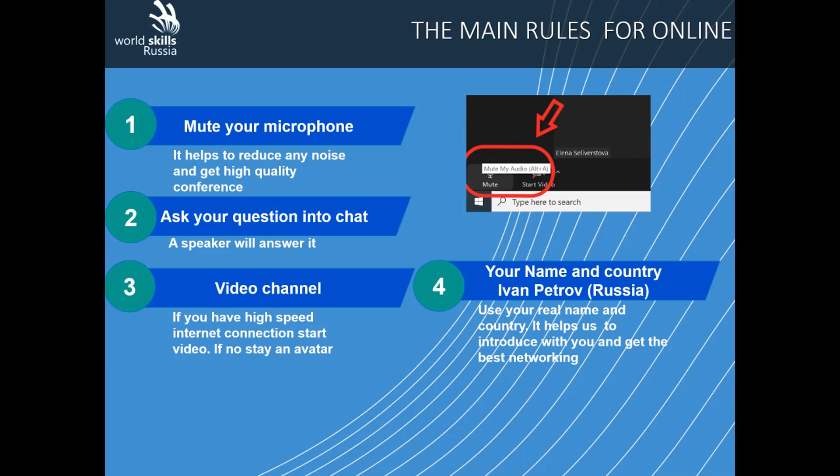I just saw a question in our chat concerning today's meeting, so I'm answering: yes, we will have a meeting today, so we will really need maybe some more additional meeting minutes to let everyone join.

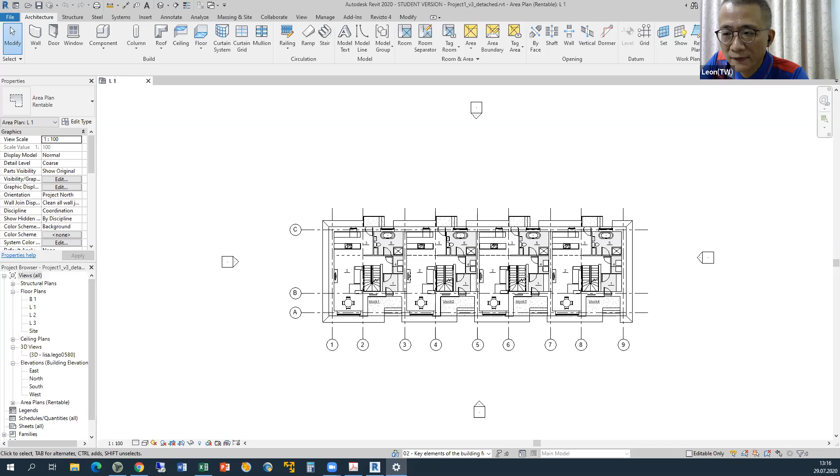Well, it started to cooperate with me. Let me see, I can do it. Or if you don't mind, Jacek, I can do it first. Okay, so perhaps Leon, try to start the thing. I'm sorry everybody, it's sometimes as usual, it happens at the worst moment that your computer hangs. But Leon, take part, and I'll try to do my stuff.

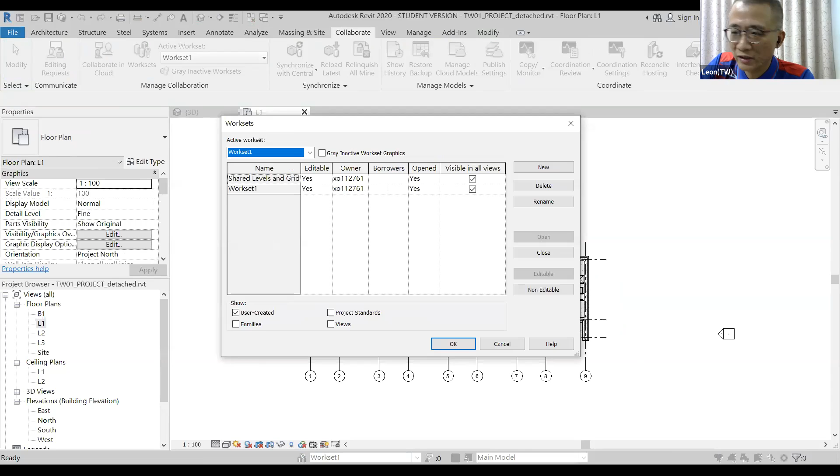Okay, in here, you go to collaborate, then worksets. In worksets, it just has workset 1. So in here, I think this one should not be yes, right? This should be no, right?

Yeah, and as well as the elements are not structured by worksets. So here is none, right? Yeah, because there is.

Leon, maybe you could also open this mark scheme, what everybody knows, what you're assessing. It will be more visible. Because guys didn't see the workset, no, the table? No, we see right now only a Revit screen. Oh, really? Let me see how.

Share a screen, not a program, because when you started to share, you choose, and you should really choose, for example, to share a screen. In that case, you will see everything what you have on your screen. Okay, let me try again.

Can you right now see? We see right now the Excel table, yes, and the Revit, yeah, it works.

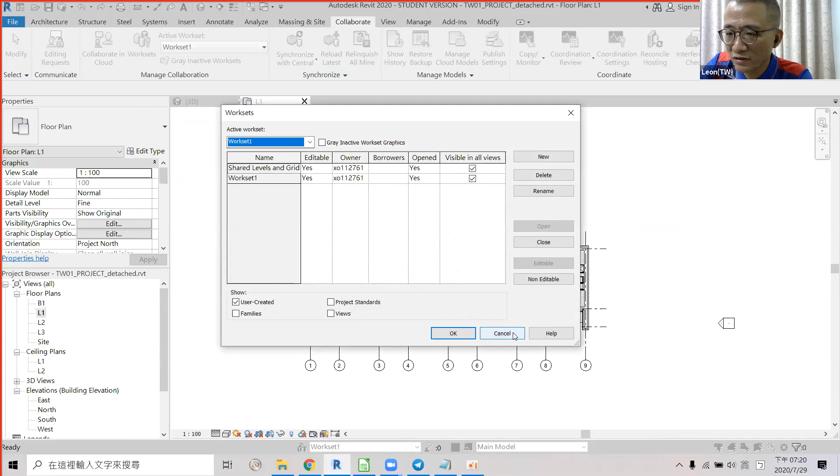Okay, thank you, cool. And right now I'm checking the elements. The second one, elements are structured by the workset. But in here, my student didn't do the workset. So in here, he didn't get the point, right?

So the third one, material are assigned to the object of doors used. So let me try to see.

His door. So, sorry. Okay, and I am checking the material. So he has two materials on the door. This one, check.

And so in here, I have questions about the material because my students use the Revit in English version. I mean, they use English and Chinese version at the same time. Then some of his project has this kind of like Chinese letters.

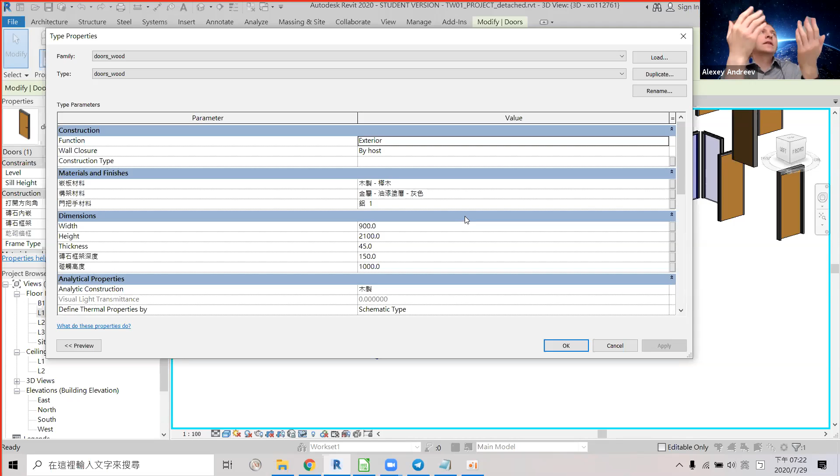So I mean, in the competition place, we will have the computers which will be 100% according to our rules. But right now it could happen, and we saw yesterday, I guess, when we assessed some Russian students. So I mean, if it's okay, we should really train.

Okay, cool. So in this part, also this door, it has material, 3 of them. So in here, material are assigned to door. Is yes.

Then about the window, let me see the window. In here, the type. There is no material on it. But when I try to double click to this family, try to see on here.

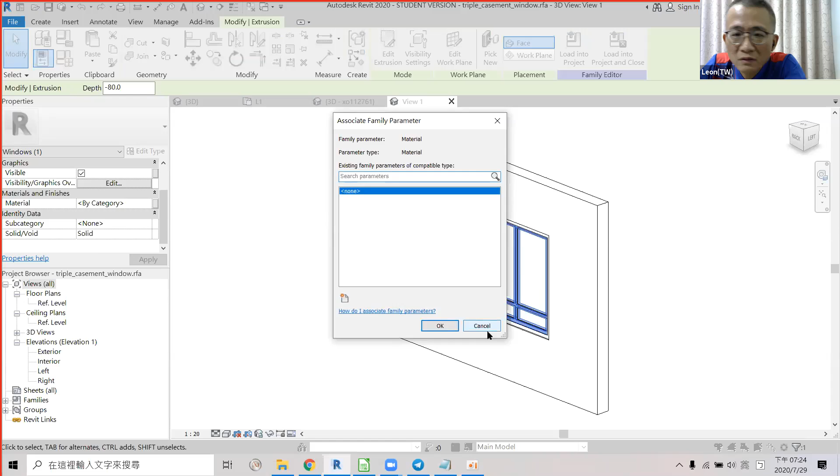And here, material assigned by category. So in this part, I think he gets the score.

What do you think? If I'm right, yesterday if it was not explicitly assigned, we signed as a no. Correct me, Anna? Yes, it's right. Yesterday we put no in this case.

So if they show in here by category, he didn't get the score, right? So it was yesterday, for example, when the students did not explicitly assign the materials, we scored as no. Okay, thank you.

So number 5, material are assigned to the layers of the wall type used. So here the wall type.

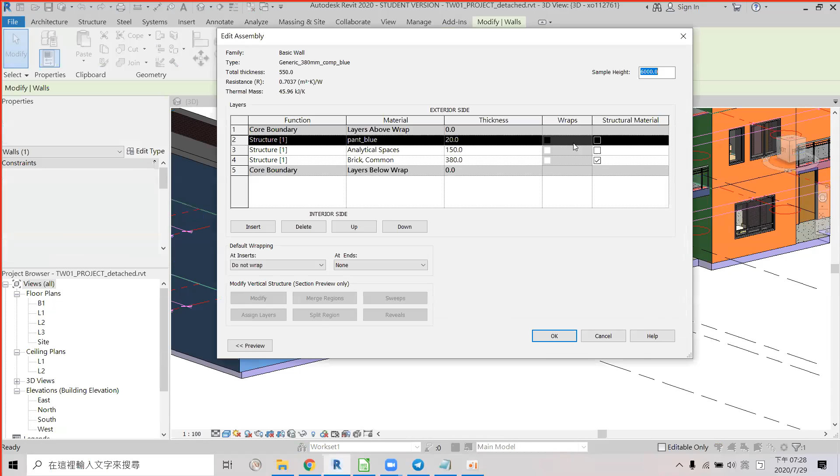Okay, so in this case, thank you, Anna. So in here, he has 3 different types. So

In here, I think the wall types should have like 3 points, right? Not in this way. 5 types for all projects, at least 5 types, not for one wall. Okay, for all models. We can have one type, one material in one type, or 3 materials in one type, but for all the projects we should have at least 5.

Okay. So let me see if there are any more types. There is one more. So total points in here should be 5 points, right? Right. Okay.

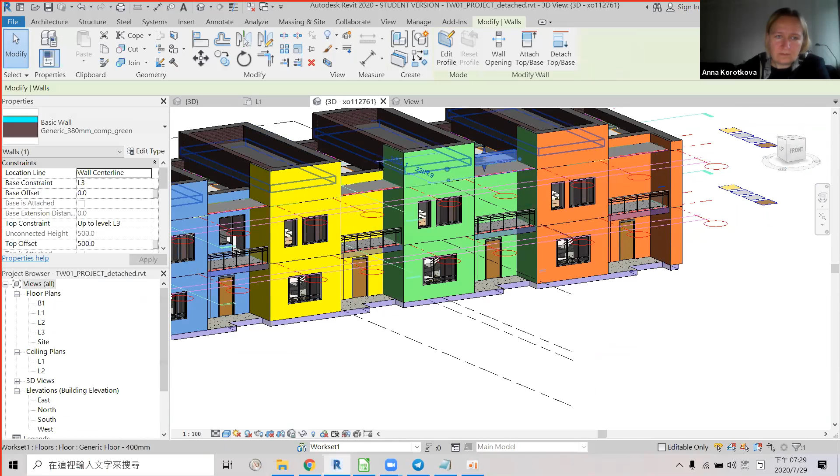So in his case, I think he has only 2 types of walls. Let me check again. Sorry, Anna, you can speak. I think that we have another type in interior walls.

They should have material, and in our project totally now we can see 5 materials. If I correctly understood, Anna, she also mentioned about internal walls, which we should also count. Correctly, Anna? Yes, correctly. So where can I check the total numbers over here?

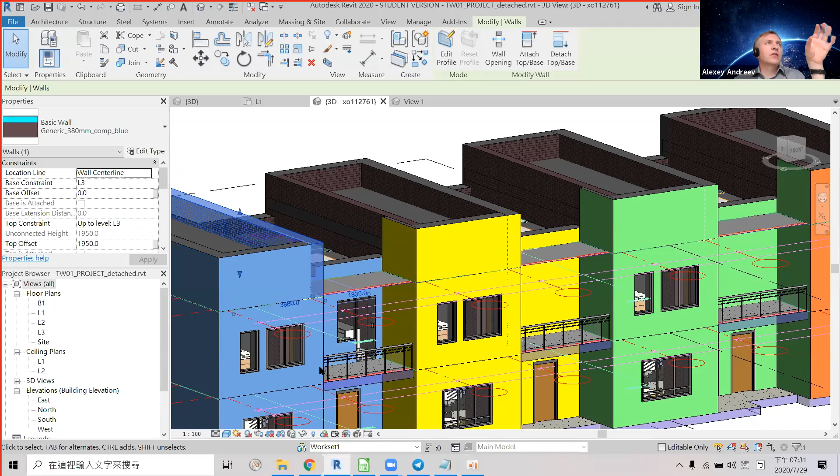Anna, did you yesterday check on the floor plan? Yes, this type of walls, on the floor plan. Leon, can you really check the floor plans? Floor plan? But let me see.

In here, we are checking the wall types, right? And Anna is saying about this, right? No? We are talking about the floor types, right? Checking from here. Not about floor types, but about walls which are not exterior walls, not outer walls, but which we have between rooms inside the house.

I don't really understand what you mean, sorry. Leon, I think that you should go to the first floor plan, for instance, find an internal wall. You see somewhere it's close to the staircase, whatever. You have some walls here. Oh, you mean this one? Oh, this is okay, a partition wall, probably, but also should have assigned materials, as I understand.

So check the edit type of this basic wall. Oh, okay. So it doesn't matter how many layers they have. The only thing we have to check is the material on it, right? Also here. Here. So it has the materials on it.

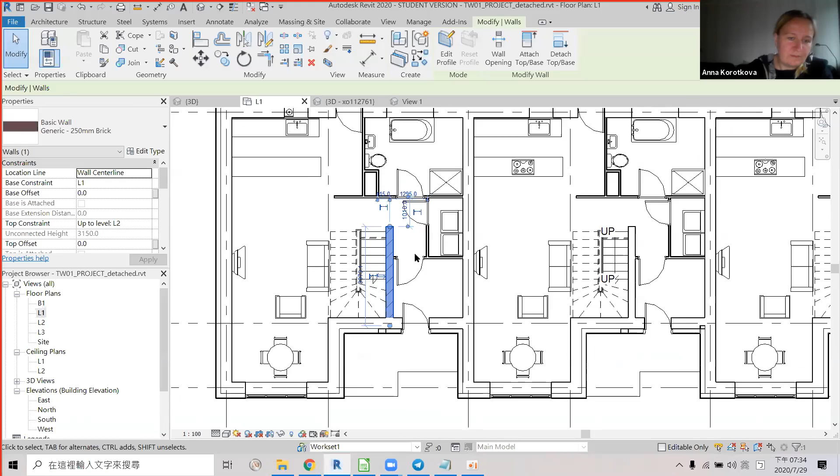Okay, but you also can check the wall which is on the grid inside the house. Which one, please? And you are muted. The wall, load bearing wall, which is situated on a grid, on axis. Which one?

Leon, I guess it's not only internal wall you should count, but also external wall, right? Yeah, I'm talking about internal wall. The external walls, there is only the thickest internal wall. You mean which one? I think the internal wall separation between the house and the other house, the center one. Yes, that one, I think. This one? Okay.

Yeah, it has material on it. Okay. So 1, 2, 3, and 4. And what else am I missing?

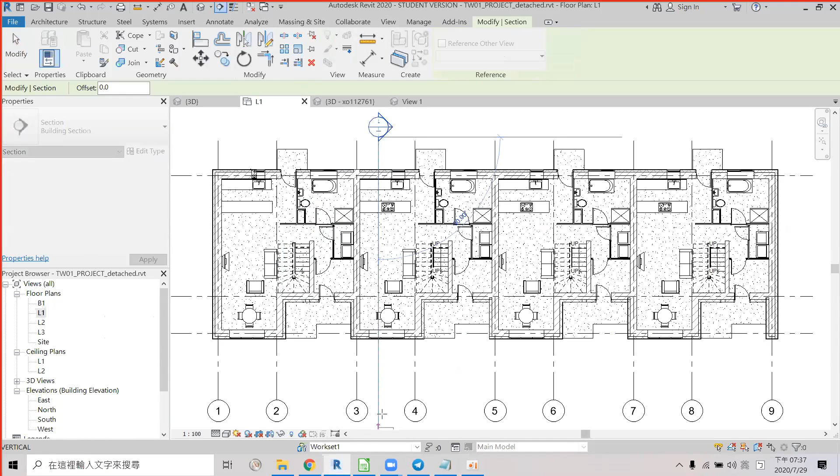Oh, how unfortunate. Is that... No, thank you, it's okay.

Material are assigned to the structural floor types used. In here, the students only use one floor. Let me see. In here, floors. Yeah, it has materials. And in here...

Yes. And this one. Actually, this one should be roof, but the student did it wrong. It used the floor. So in here...

So in this situation, should this roof count in the point if he did it in the right way? I mean, if the roof has material on it, should it count the point? For my point, it's not. So in here, the structure type of material used in here should get only 1, right? Because in here, the students used the same one for in here and here, right?

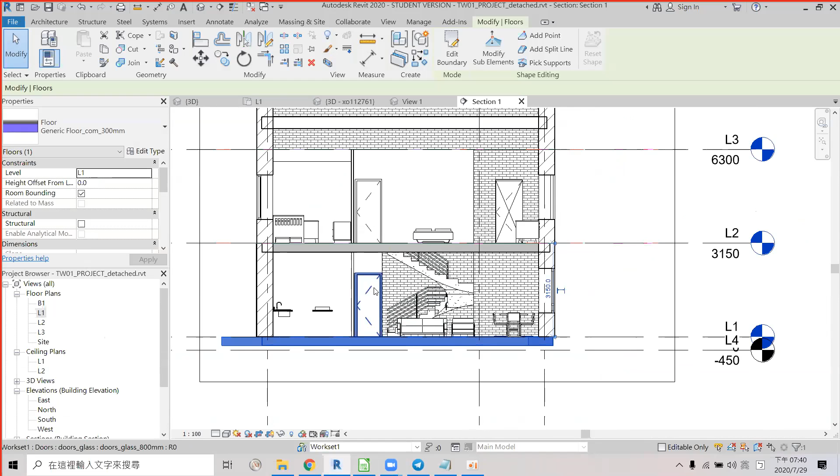Okay. Yes, that's right. So in here about the roof material, the student didn't use any roof on here. It's not roof. So in here, he should get none.

Okay. And material are assigned on object. Let me see the stairs. Stair. Isolate. Sorry. Edit type. Now in here, I didn't see the material, and also let me try it in here.

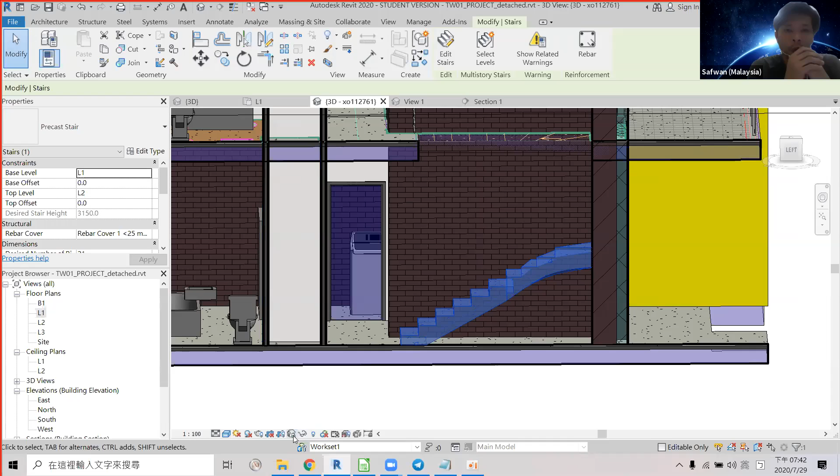Sorry, I have a question regarding the material assigned to the stair. Basically, there's no default parameter that indicates the type of material of the stair. So should the student customize a new parameter so they can assign it, or just rename it as maybe some precast stair, or cast-in-situ stair? How do you think about this issue? Because there's no default parameter assigned to indicate the material used in the stair. Maybe others could help me with this issue.

For my thinking, I will give him the point for this option. How about you, Anna?

Yeah, because when I try to check his material on the edit type, I didn't see that option here, but in this way, I see there is a material on it. So I think here, his material is already assigned. I think the material is assigned, but I don't know exactly how it was done.

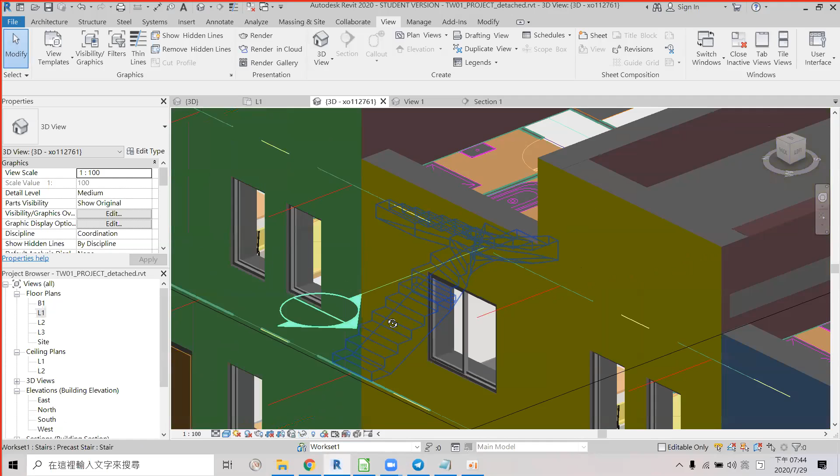So here is a similar situation as we discussed. So the student here, he shouldn't get the points from here, right? If he just assigned by category.

Student should assign the material here. Yeah, so in this situation, he didn't get the point here, right? Yes, this is what Anna says, Leon. Okay, so 'just by category' means he or she didn't do anything about this material assignment.

Okay, let's assume another situation, because my student didn't do the railing on his stairs. So I'm thinking, if he did a railing here with the material, should he get the points here? Because here he didn't use the material, but here he used the material. Should he get the points from here? It's like half and half, right?

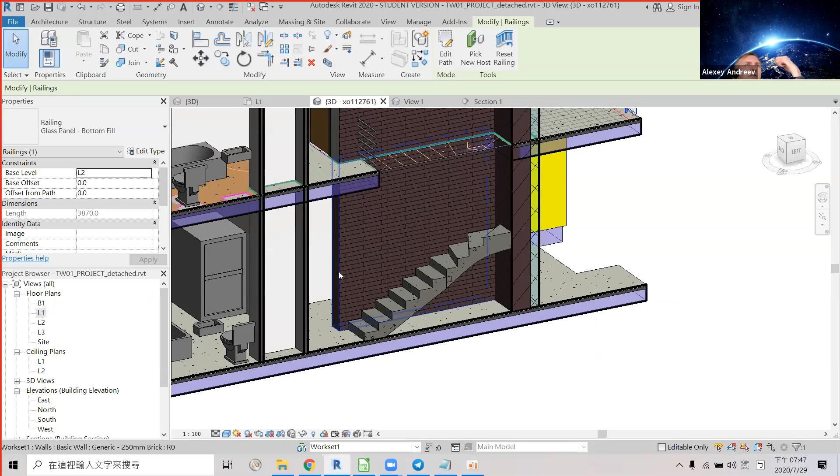But Leon, did the students do railing? I mean, on the stairs, because right now we saw the material on the stairs itself, not on the railing. That's why I'm asking. I mean, if the situation is the student did the railing here and also here, only did it here but not here.

So should he get the points here? But so far we saw what students did was assign materials for stairs, not for railing on the stairs. So it should really be different. Oh, okay, yeah, okay, I get it. So here it's no.

Okay, let's move on. Is the load-bearing part of the outer walls modeled separately?

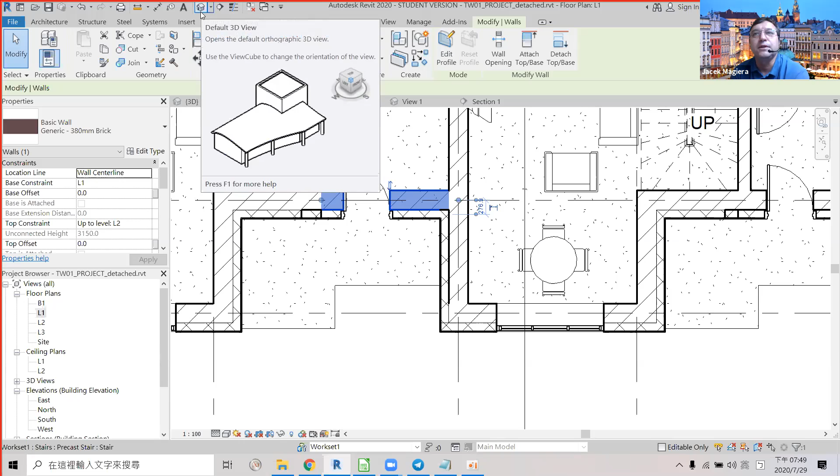Yeah, this one was different from the exterior decorative wall, but the other way, in the upper part of the floor view, you really have a compound wall with the load-bearing part as part of the whole wall. So it's partly okay, partly not. So in total, it's not. Yeah, looks like it.

Okay, do you agree, guys? Looks like we should punish them if the scoring rule is 'walls,' meaning all walls. As Alexey always says, we should really punish our students and work towards WorldSkills, so they're aware of these catches.

And you see, Jacek, to me it's always painful when I have to punish students. Well, yes, it's not a comfortable thing to do, especially when they think they did what they were supposed to do, because it's a building, it has walls, and so on.

Yeah, so for my thinking, in this part we have the score as a measurement, so it's a yes or no question. So if someone did part of it, he shouldn't get the score. That's my point, what about you guys? For example, if we set up rules yesterday, we should follow them for all students with a similar procedure. So in that case, I refer to Anna - what's really the restriction, the assessment method, the criteria used yesterday? What do you think?

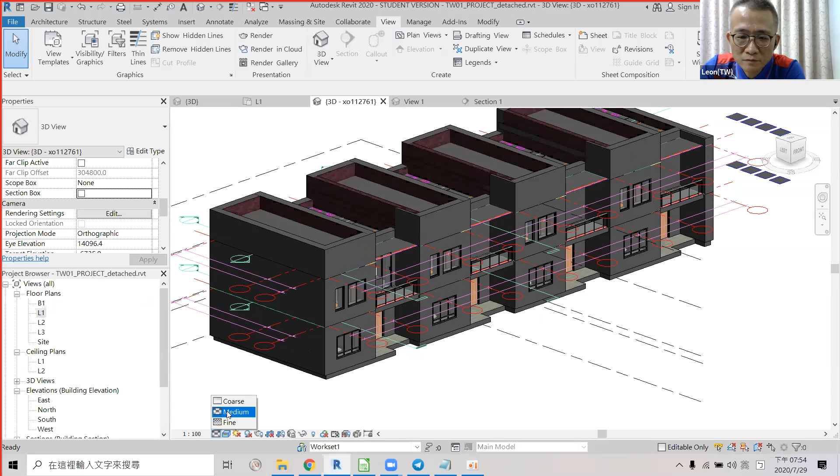So, okay. All walls are classified according to the building floors. Here, level 3. Here, level 2. Here, level 1. Level 3. Level 1. Level 2. 3. 2. 1. Okay, so in this part, you get the score.

And here, insulated layers protect the load-bearing parts from all sides. In here, he is trying to do this. Same here, but here he has something wrong. So in this situation, I believe here is not right. That's right, yeah.

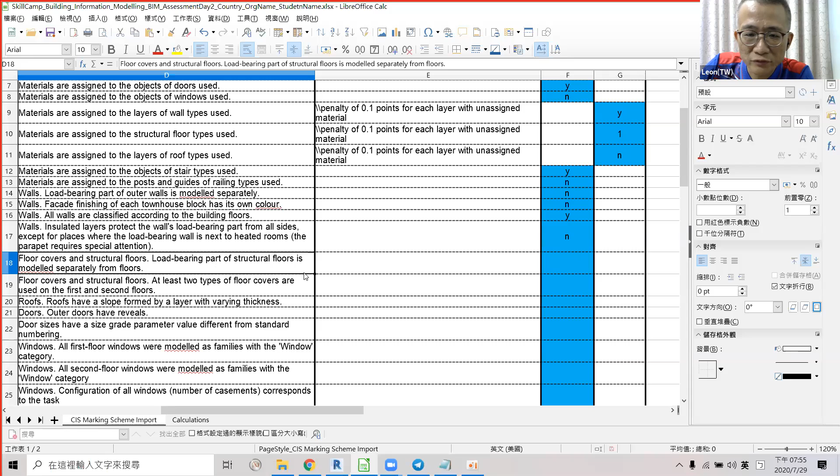So 18, floor covers and structural floors, load-bearing part of structural floors, is modelled separately from floors. Get him the point. And roof, there is no roof. And door, outer doors have reveals. In my case, they didn't do it. So reveal, no. Door size has the size grade parameter value different from the standard number.

Door. Okay, let me check the door. So in here, we should have type in here, should be like this, right? So in this part, no.

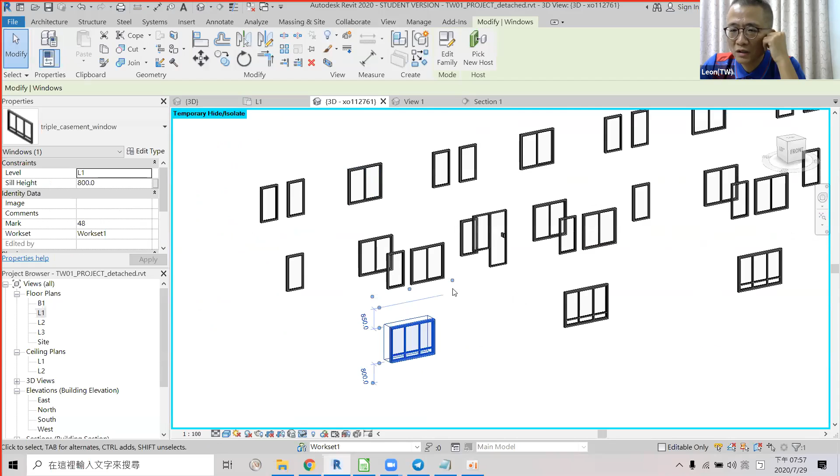Balcony doors, we should check only the categories of first floor. First floor, as a category, it's Windows. All the time you've got the Windows category just next to edit type. So it's perfect to me. Oh yeah, you mean it says Windows here? Yeah, everything is a type, a category as Windows. So it's perfect, should be yes.

As I don't know, Anna? Mm-hmm. Alexey, what do you think? That's okay, it's correct. Yeah, it's correct. Oh, yes, really?

Okay, the trick was with the balcony door, it should be category. Yesterday, somebody put it not into the categories as a window, but probably as a door. But today we see the balcony door, it's one instance of the family, but still it's a window type. So it's a category, proper category for this. It was the requirement. So it's perfect, yes.

So in here, we should put yes. So second floor is the same. Let me see. Second floor. Yeah. Okay. So in here, 25, Windows configuration of all Windows, numbers of casements correspond to the task.

I think it's yes. And Windows have no reveals. And 27, along the perimeter of the building above the window are cast in place reinforcing belt. Reinforcing belt.

No. And also it has no lintel above door opening. Let me see. Yeah, there's no lintel. So it's not.

And here, this one, I'm not pretty sure. Let me see my students. There's no beams. And also in here, there is also no beams.

But I'm not sure what kind of situation here should be correct, because I try to see the drawing. Where are the beams? Does someone know about this? Anna? I can show my desktop and show it in my drawing. Okay, okay.

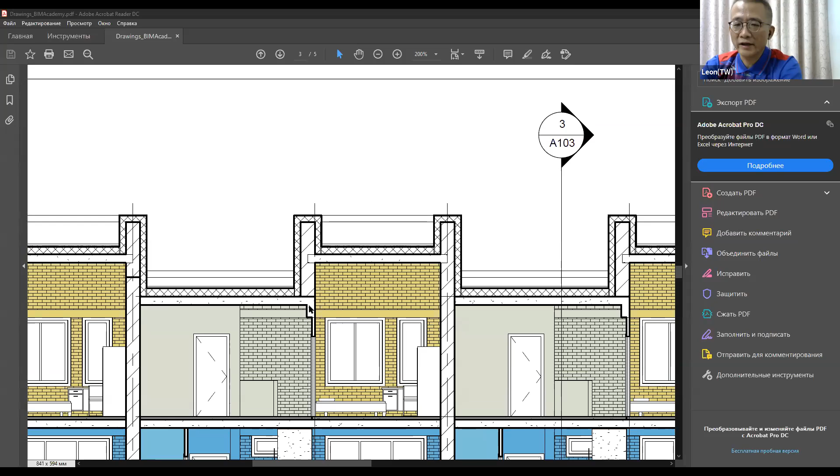This one, can you see it? Yeah, it's about this. Okay. Now I get it. Thank you.

Okay, you mean here and here, right? Cool. So in here there is no cameras.

No topography, terrain. And we see, no, there is no terrain. And furniture. In here, my question is,

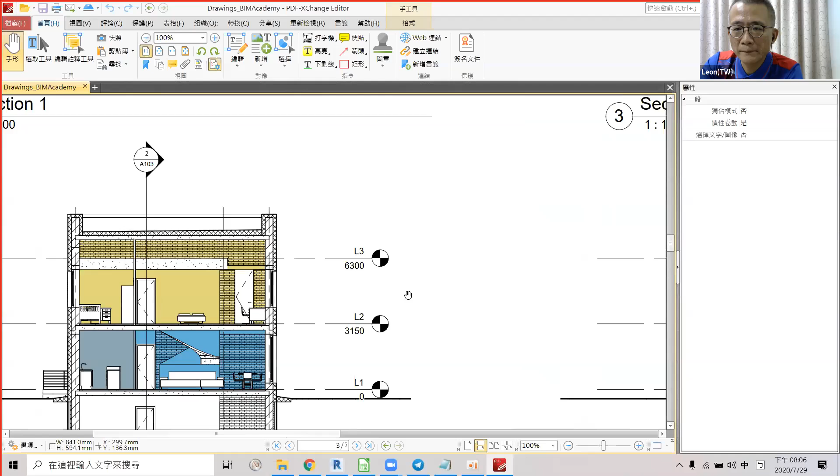should all students have all the same furniture as we show here? For example, the sofa here is different, but he has everything on his floor plan. So should he get the score? My point is he will get it. What about you guys?

Here and here. And also the television is different.

I think, Leon, that yesterday's task was something about a 200 millimeter allowable difference between the furniture and all this stuff that they were supposed to borrow from the sample RAC sample file. And there was something that measured this performance, assuming this time we are not bound by this demand of 200, at maximum 200 millimeters of difference.

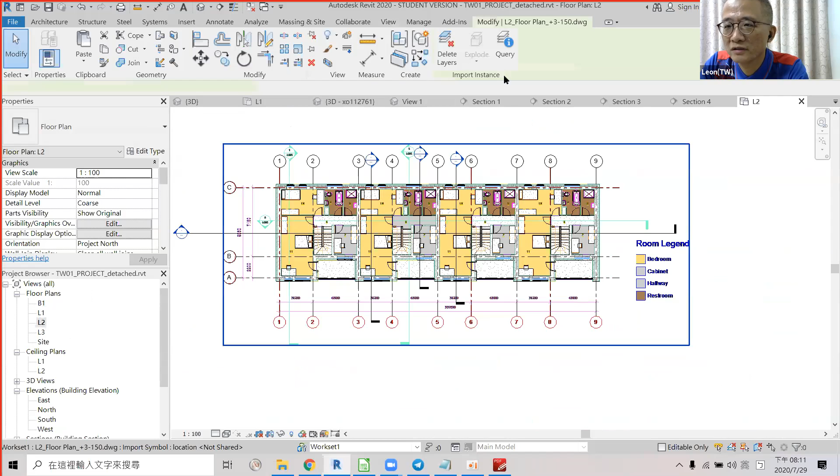And second floor. Yeah, in this case, it's best, it's wrong.

And the toilet is different, so he shouldn't get the score from here. Right? Okay.

So stairs are modeled. The beginning and end correspond to the level.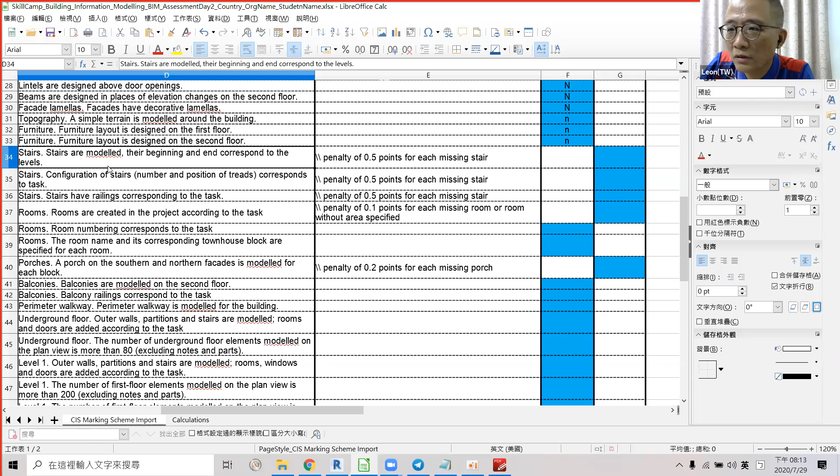So its number should be 21, and correspond to the 4. Correspond, so it's yes, right?

And also configuration of stair numbers, position and treads correspond to task. Yes.

So the rating is different, because in here the rating should look like here. Yeah, so it's wrong. So here, no.

But in here, I'm not sure if I understand. Does penalty mean in total we have to have four stairs, right? 1, 2, 3, 4. So if we lack one, it gets a penalty of 0.5.

Totally, we should have 4, and if you have only one correct type, you can put the number of it here, and then about points, we'll check it ourselves. Okay, okay.

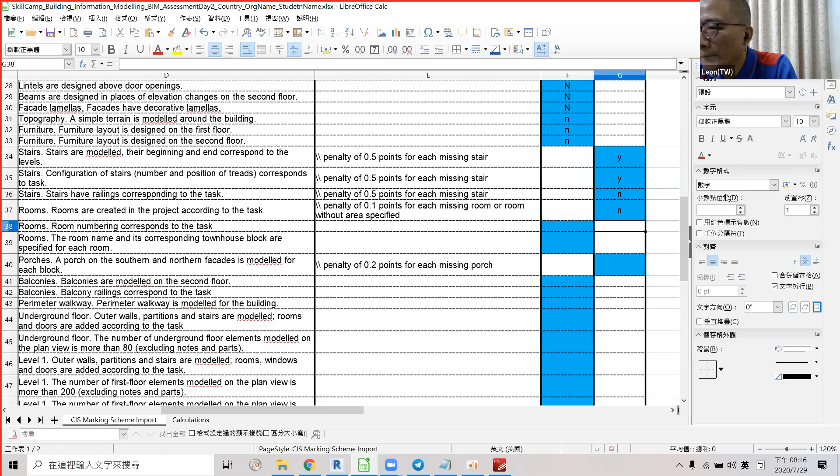Totally, we should have 11. 11? 11. Okay. Per segment or?

Per section, yeah. Okay, cool. So in here, room number, no. Room name correspond, no.

Porches. In here, I think my student... here, and here, but it's not correct. The issue has the rating in here, but he didn't do it. But I think he still can get the points in here, right? What do you think, you guys?

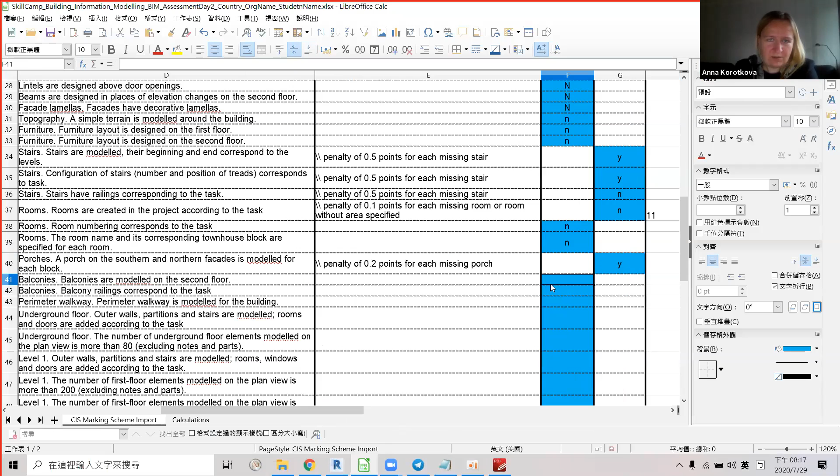Cautious? Agree with you. I think it's no, because the configuration of the porch is different. Okay, thank you.

So, balcony is modeled on second floor. Here. So it should be yes. And rating here. This one, let me see. Here, yeah, it's the same one. So in here you should get this.

So perimeter walkway? No, there's no walkway. Underground floor? Unfortunately, no, it's empty. So, no. Underground floor? No.

So level 1 outer wall partitions and stairs are modeled. Rooms, windows, and doors are according to the task. Because in level 1, my student didn't do the rooms, so I think in here he shouldn't get this score.

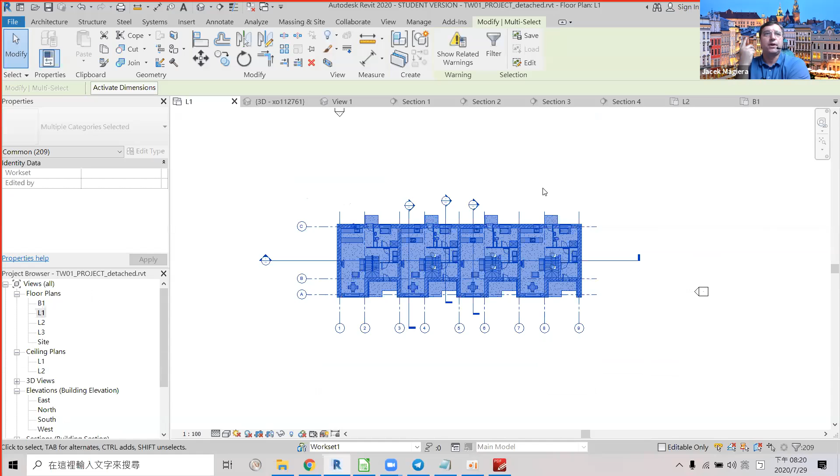Because you selected everything. You just could go to the visibility graphics setup, as yesterday Anna did, and then filter out all these annotation categories. You go to annotation categories, the second tab, in the upper part, a little bit higher. Yes, it's lower. Sorry, you mean this one? Just one line above, annotation categories.

It's a tab. You see the tab? Oh yeah, switch it off. Click it, and switch it off. Show annotation, it's a check mark just in the line below. No, to the up this one? And to the left. Yeah, here, just switch it off, and it won't be shown and it won't be selected.

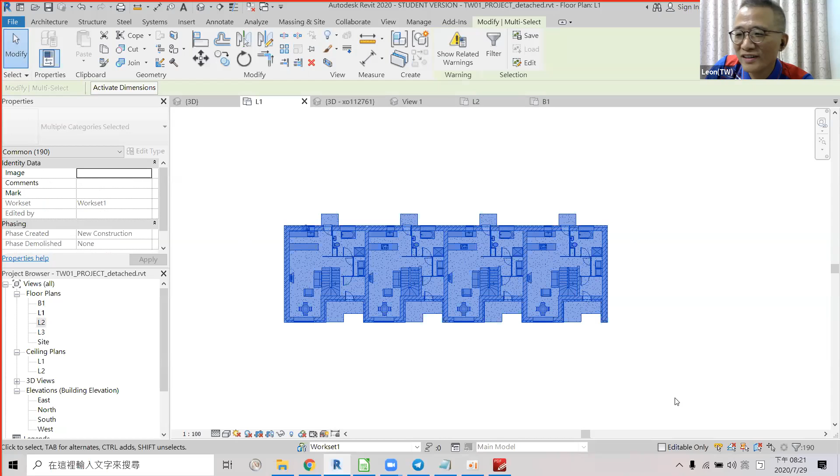Okay, do the crossing window selection. Okay, so right now here, yes, it's only 190. So no, no, no, no, no. So should be in the second floor. Didn't pass.

No, now you're still on level 1. You didn't switch the view. It was not bold type. Click twice. Yes. 190. So it's still here. And the rooms are also not present, so it's no.

No way, they will be upset. Today when I was doing this, I was thinking about how long did every expert take to do this. For me, I have two students to assess, and I spent a whole day doing this.

Okay, so we will have one for about 4 hours. What about you guys? So, Anna, how much time did you spend assessing your student for yesterday's task?

You are mute. Half an hour per student, for one student. Okay, Jacek, how much did it take for you? It was much more because I have to check everything, the number of walls, the number of different types. It's crazy because you have those numbers in your mind and we don't. So I just played the video from yesterday, tried to see what the discussion was about. Yeah, that's crazy. It was more than 2 hours to go through.

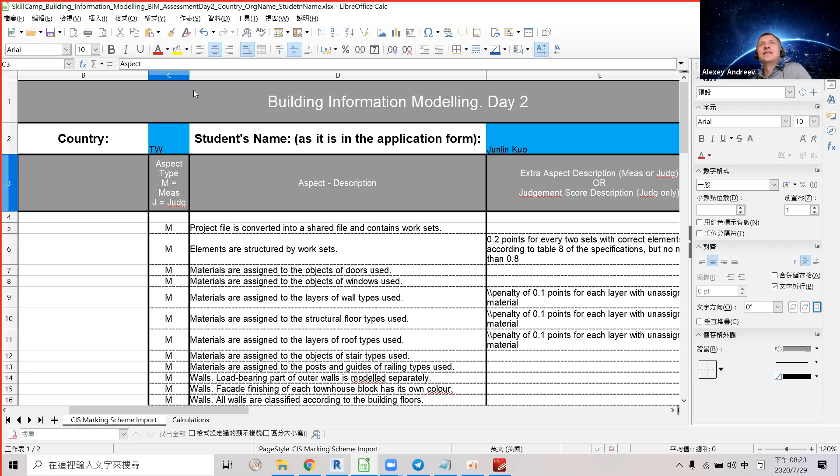Bruno, how about you from Brazil? Did you have a chance to assess? Yeah, not yet, I just assessed day one. My students haven't finished the model, we were working on it until 11 p.m. yesterday. Okay, no problem.

Someone from Malaysia, did you have a chance to assess the second module? How long did it take for you? Yes, it took me around plus minus 2 hours for each student.

Okay, so dear experts, we have a special reflection session planned for Friday. Honestly speaking, we're experimenting right now in Russia, and maybe we could show you soon — we're trying to do an automated assessment. So that's why, even right now, we try to have real measurable assessment aspects, so what we could convert into some scripts, into some automation procedure.

So that's the way we're thinking. That's why here we do not have any judgment scores. And you see, we also try — it's not perfect, as we all see right now — but that is the way we're trying to develop it.

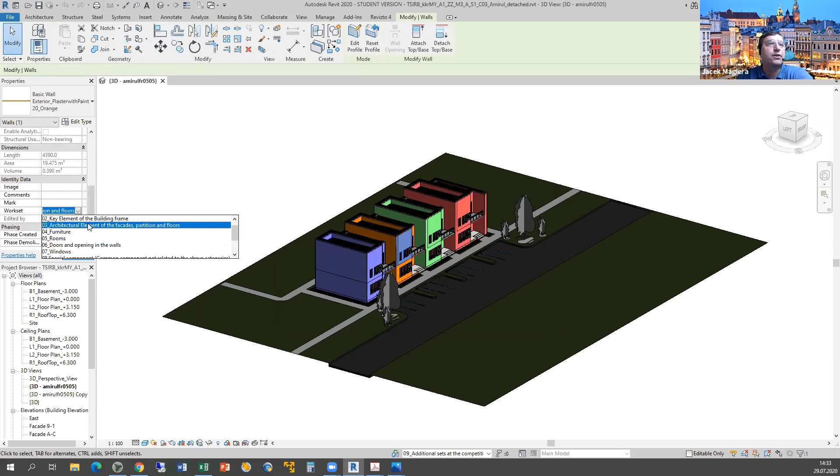So it's perfect. Perhaps some others - we're not able to check everything. It's a window and it's 07 windows. Oh let me see, it's furniture which should be on another workset, of course.

It could happen that some components are not on the proper worksets, and really, I don't know - there's a chance to go to collaborate and in the workset change the visibility. But perhaps there's no time to do it with every type of workset here.

Just we might try to okay this and see the furniture workset. So probably, well, the site element shouldn't be here, to be frank, and we see some trees.

But you checked also topography, so what was checked? Yeah, I'm sorry. So it looks - I didn't notice this, I'm sorry. Oh but yes, it looks topography. Yes, yeah, so right now it should, yes, and this is well what we see.

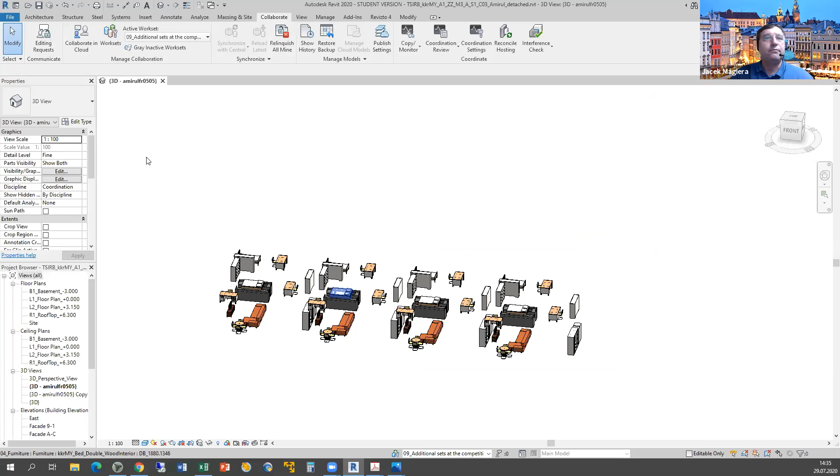Materials are assigned to objects of doors. Well, we then go to the worksets, switch the visibility of all the... is there anything else? No.

Okay so let me pick the first thing, I change to realistic. It's a loadable family, and right now we may check the materials.

Okay let us check another type of doors, and it's the same, so it's almost the same type of material. So for the purpose of this scoring, well, I think that it's yes.

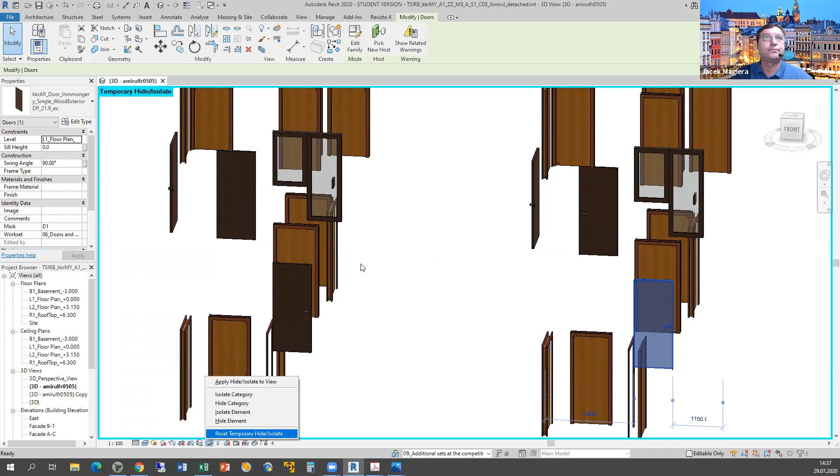The families they did by themselves from scratch, they didn't put the material category. My student also did this - they just forgot about this, as it seems, because there is no material category. So this element should go to the family editor.

We may check the parameters here, but there is nothing like this, so they should probably add some type of parameter like material here and so on. So because this type of window, I believe it's the problem that it was created from scratch, and this causes this lack.

So perhaps we should be more careful to prepare our students, you know. So anyway, do you agree that this is no?

Of course I checked one of the windows only, but they are the same style - I mean it's their own creation.

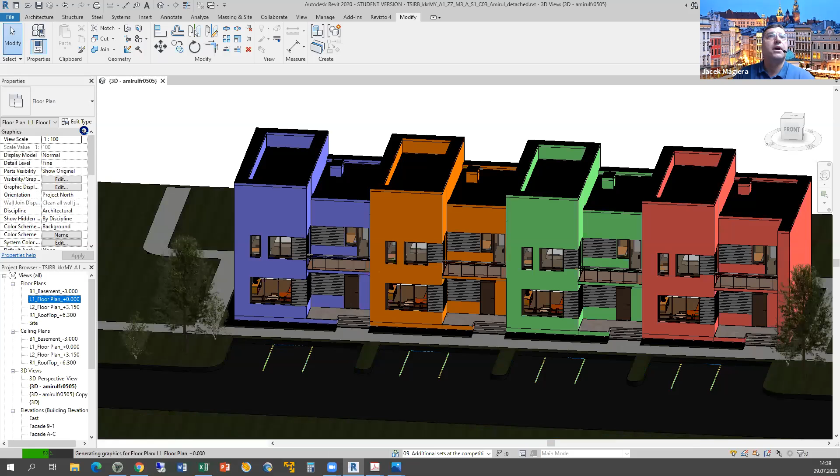Materials assigned to the layers of wall types used - so it's probably the easiest thing to do is to go to a floor plan view and perhaps not click on these things, but try to pick the walls they prepared.

And I don't see any particular wall that is a custom family, so there are standard families here. And walls, I'm sorry. So I really don't see...

I managed to switch off the properties, so it's basic brick, so it's probably a wall that was only modified by the competitor. And materials - brick common and structural materials - so it's correct here in that case. So it's the modified standard family as it looks to me.

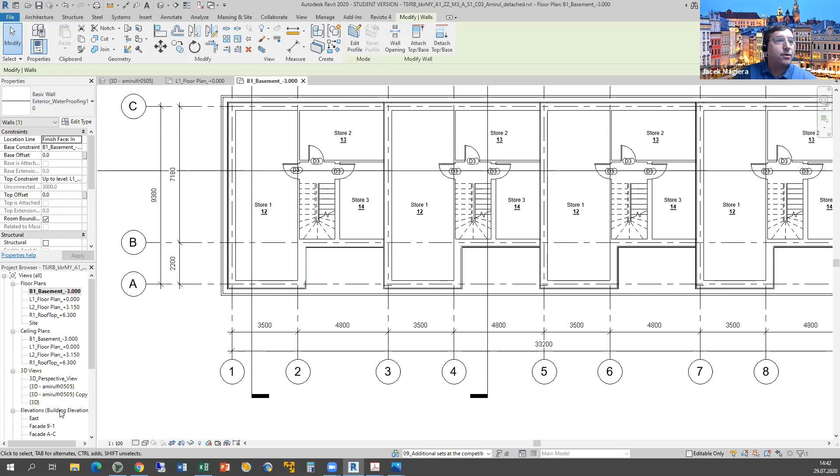So frankly, after checking this couple, I think it's yes here, which means that this at least 5 could be found. Structural floors. Do we have any cross sections here? There are some cross sections. Let's see a cross section.

So it's interior concrete 180, and the structure, it's concrete, looks nice. Nothing wrong with this. It's again the same.

It's basic roof, so it looks like this is another type of exterior concrete. Let us check this. Structure, and that's it.

So, by the way, were the thicknesses correct? Because I don't remember those numbers exactly, it was not explicitly put, so the student should measure them. But looks to me that 380 and 300 was okay. But Anna, could you please comment? I think you're right. I'm agree with you. Totally. Yeah, okay. So it's yes.

And materials to the layers of roof, we managed to touch the roof here, just in search of. So let us see this type and see the structure. So it's concrete. So formally the material is okay.

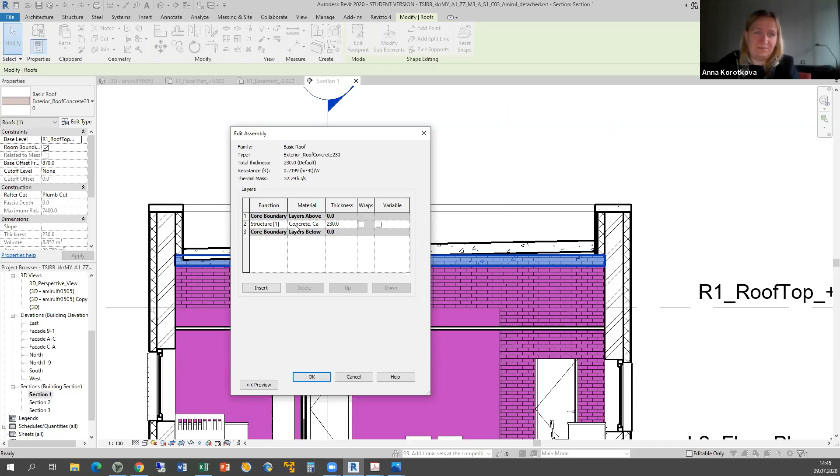So how do we assess this? Because it's not isolation, some sort of, and this variable thickness should be probably marked here as a property. So what's your opinion? I think they should put no, because this... yeah, it doesn't have layers. Well, formally it's one layer, and we will accept that this is a proper family.

Because there is another one here that is also a roof type, and this is, let us check this. Yes, this is another one, but there is no isolation, no. So the roof is somehow, you know, a twisted thing. So here we put no, as I believe.

Stairs. Do we see any stairs? Probably yes. Smooth structural monolithic concrete cast. So I think it's okay.

Another stairs, do we see any, perhaps on the 3D view, the external, or this is somehow... looks to me that, oh, it's not a run.

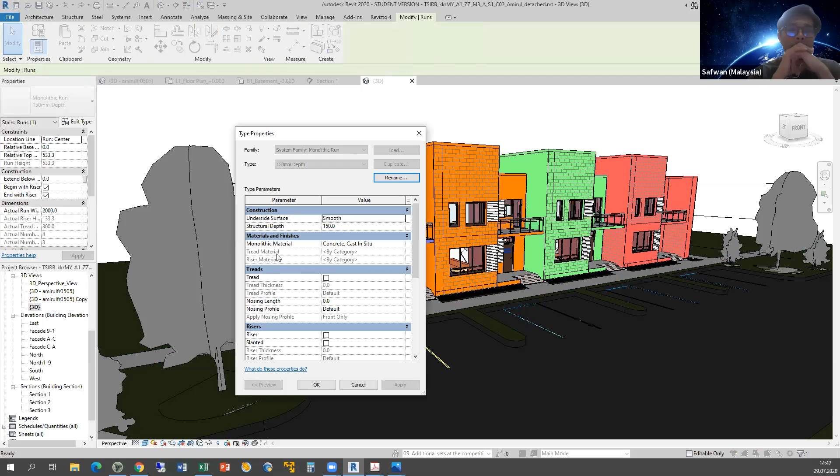Well, we don't have tread material, riser material. It's just a concrete cast in situ. So what do we do? Is it...

Well, if we agree that these stairs could be concrete, just simply concrete, no tiling, no wooden, whatever, so this is a material. I would accept this. I accept this. We can, yeah, do. There was nothing about any, you know, finish on this.

Sometimes in our country they have porches without finishes, only concrete. Yes, this is what I say. It happens very often that the outside stairs are simply a concrete thing without anything. Well, of course it depends. Frankly speaking, I'm not sure whether it looks like... it looks like some sort of different colors here, perhaps.

But well, it would depend whether we require this extra material because it's partly done. So yes or no. To me, it could be yes. Anna says yes. If anybody has any comments, please. Yes, yes, I agree. Yeah.

So it's modeled as a stringer gypsum wall board, so it's formally not railing. What do you think?

But I have a question. Do we have another way to do railing like this, not by using wall like in this project?

It's a good question. Perhaps we could think of modeling in place and look for a category like railings here and do something that's semantically correct as railing and it's not a wall. This is probably the way we should follow in that case. You agree? Because if it's a wall, it's semantically not railing, so functionally, in all these schedules, it will be messed up with walls because we have railings as walls.

So probably it's a component you buy from a distributor as a railing of this type with some sort of attachments and so on. So whatever we agree, it's correct. But to me, it looks like this should be done this way if there is no family for something, I mean already pre-designed family for this kind of railing. But I'm happy to hear your opinions.

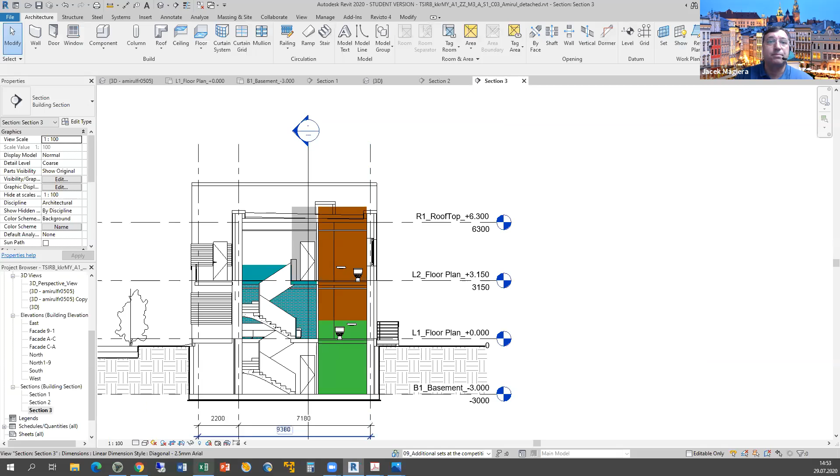It's really modeled as some sort of thin wall, definitely, and this drawing perhaps makes it acceptable to see it as a sort of wall. So perhaps if we agree with this, and what Anna says, so it's probably not the wall. The railings, this metal, were not assigned material.

So whatever we say about these internal railings, whether we accept a wall or whatever, it looks to me that here we put N, because the outer railings, I think these ones, when you go to the material, this is not said here. You agree? Agree. Yeah, so the discussion was very fruitful. It's a good thing we did this discussion about this wall as railing, but anyway, for this particular file model, we put N.

Load bearing part of outer walls is modeled separately. So let us go to the floor plan view. And this is, yes, it looks like it's a separate component. It's a basic wall, brick, and it's a proper thickness.

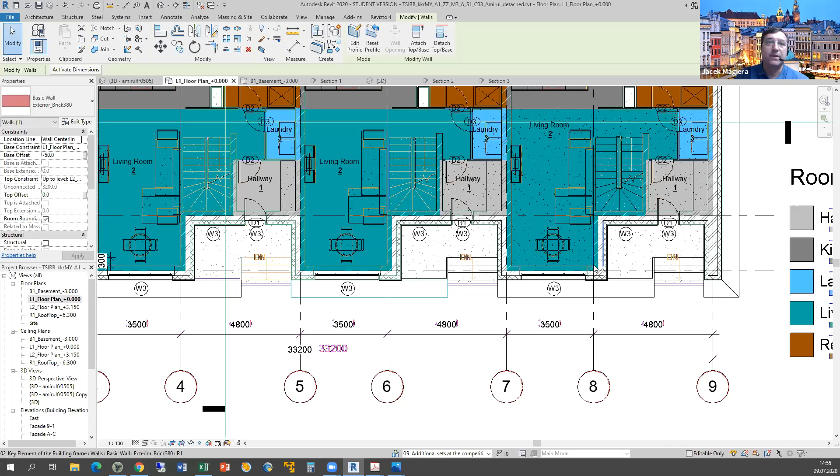So here it's the same, we see a separate brick wall, so it should be the same here. Let us look at the upper part here. Oh, it's perfect. But because external walls are those that go along the perimeter, and this is okay. I think they repeated all these components along the whole model. Yes, looks like it. Yeah, so to me, it's yes.

Facade finishing has its own color. Well, this is something we just check visually with this realistic color. Sorry, there is no color from beneath. Okay, do we accept this for different colors, for segments? I accept. Yes.

Okay, so let us go to the check mark here and we'll put yes here. Walls: all walls are classified according to the building floors. So...

It's probably, perhaps I'll use the elevation view to see the... no, is that a good idea?

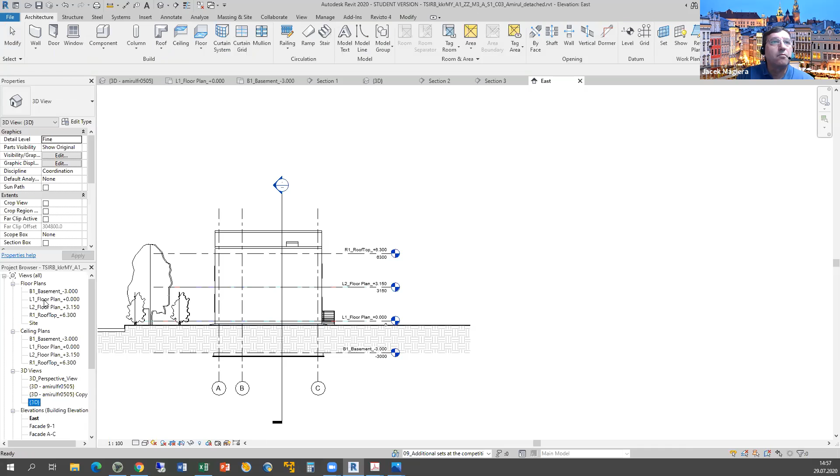Okay, I'll filter out walls, whatever belongs to this category. And we still see some AutoCAD, probably. Oh, these are not. Still see this. So it's L1 up to L2.

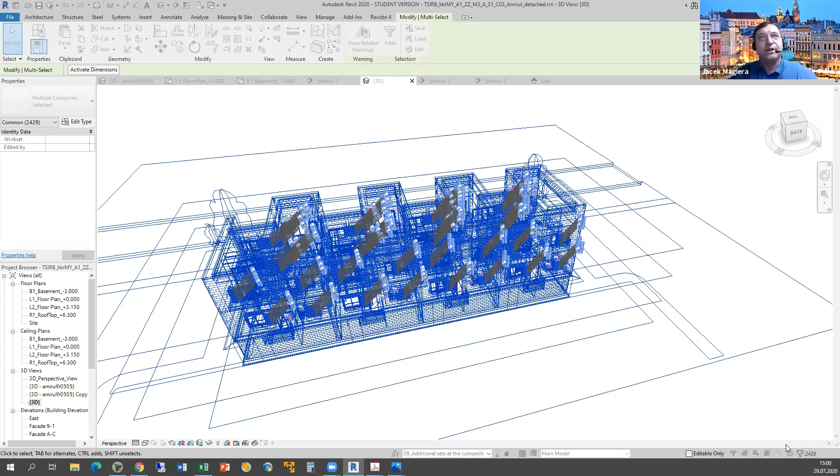Oh, it's pretty slow. It's too many components to do it right now. Okay, it's not a good idea, at least in the shared session. It still works. I was trying to see all the walls on all the levels and check them easily, I mean at least in general view.

But this is not basement up to level 1. This is something different here. This wall goes from level 1 up to rooftop, so it's probably not according to the rules. Should be split into... It's okay. It's okay.

Well, so if we find any... yes, but rooftop, it's... let us see which level, it's rooftop. So from level 1 to rooftop, it's not a correct thing, as I believe. Do we agree? I agree. It's incorrect. Me too.

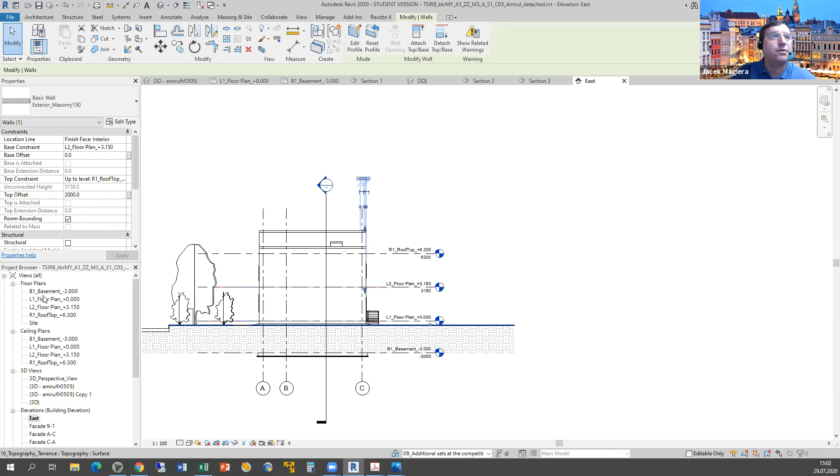Okay, so as far as I see, there is no insulation. Is it correct? Do you agree that this wall should have some sort of insulation layers, and it's only a simple concrete mass?

In that case, I would put here, if you agree with me, floor covers and structural floors. Load-bearing part of structural floors is modeled separately. So we go to this cross-section view. This is load-bearing, and it's a separate component. Yes, it's interior concrete.

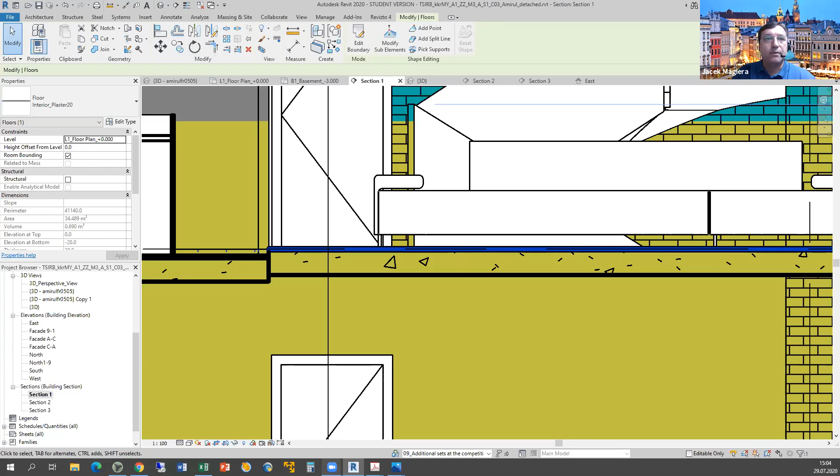And it's tile, so it looks to me that this is a carpet. It's interior plaster, 20 millimeters. I don't quite remember whether it's the structure of this wall, but definitely this part is just a wall that's a separate object. It's another family, it has only the structural material, and to me we should put here, yes.

I agree. I didn't check the rest of them, and to be frank, if we find one example that was not done, but I believe that the student just repeated this procedure in other segments.

Floor covers, at least 2 types of floor covers are used. So we saw carpet and tile. I think we may put yes here, because I just managed to find this on this cross-section view.

Roof, slope forming layer, it's not. We saw the roof, it's just some sort of inclined roof plate, but not with variable thickness, so it's no.

Doors have reveals, we'll see. It looks like it's probably done as, yeah, because there is another layer, it's another wall, so it properly avoids extruding from the external surface and cuts with some sort. So this door looks to me correctly, this one too. So we go to the scoring card and say yes.

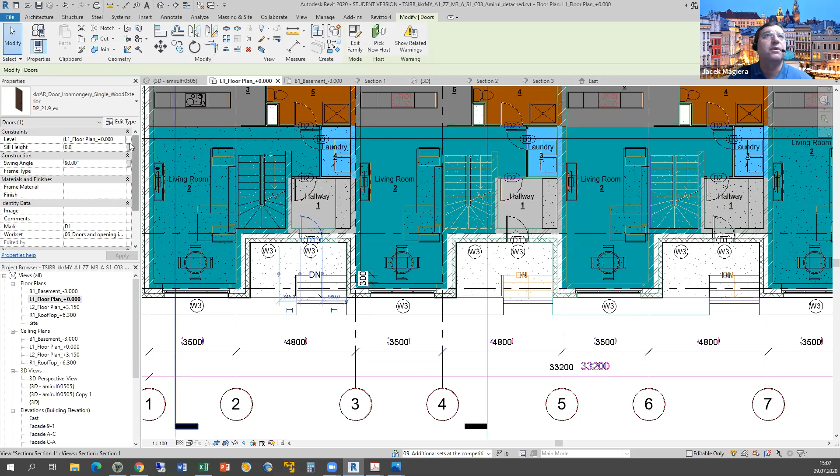There is some sort of parameter, but it's not the proper one. Usually we have this incrementing type of tag for doors. So yes, it looks standard, you agree? Agree, no letters, no additional codes, whatever, level numbering, whatever. So it's no. Window, all first floor windows were as families with the window category.

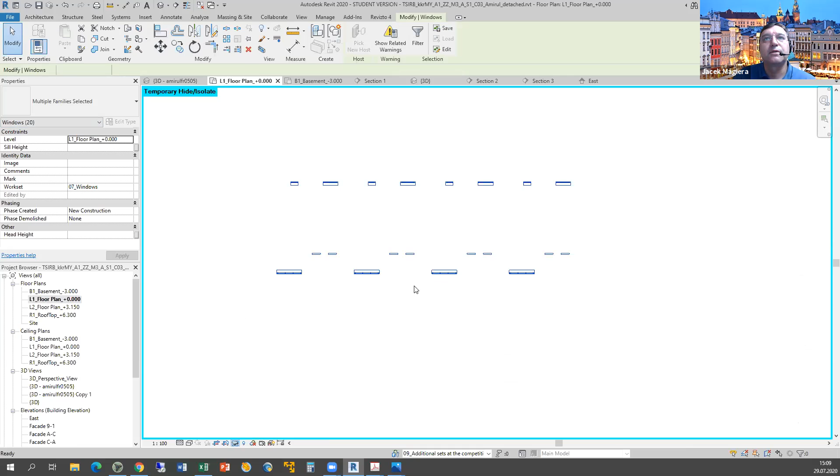I don't, but it's time consuming. I was just wondering what's the case with this balcony windows, whether there are windows or doors. And it should be, where is the placement of this? Oh, it's on the second level. Sorry, it's on the second level, second floor. So they modeled as doors, not windows.

But the first floor, the spreadsheet says about the first floor, so the first floor, it's correct, it's yes. Second floor, it's no, because this is the case with the balcony window and door that was modeled here as a door. So you see this door-window single, but this should have, as it was discussed probably twice, the category of, so I put no here.

Windows, of all windows, number of casement corresponds to the tasks. So if this family is not a good one, I mean with this balcony door, so the number will be not correct. Is it correct, Anna? So here, no. I think so, here we should put no, because if there is no proper category for this balcony window door, as window as it was requested, so the number wouldn't be in agreement.

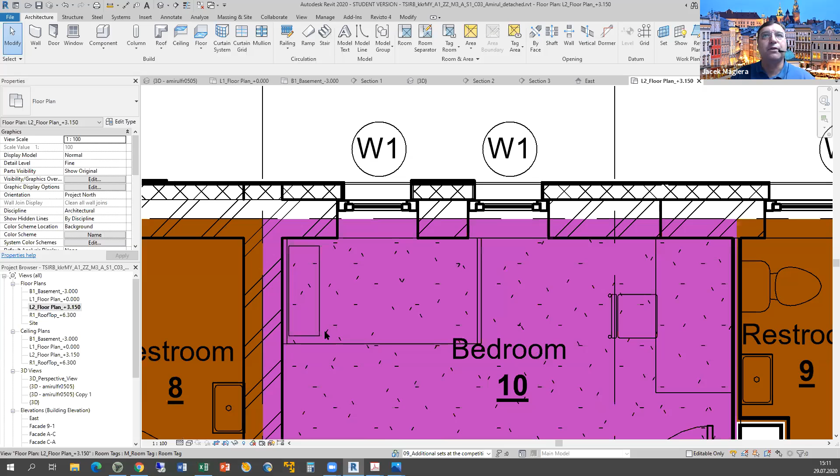Windows have reveals, so it looks like we see the same construction here. There is small collision, but it doesn't matter. There is a reveal, so probably we don't have any reason to say yes again. So perhaps, but I believe the first floor will be no different. Yes, we see the reveal, so yes, very good.

Along the perimeter of the building of the windows, a cast-in-place reinforcing belt is modeled. So will we see it on the 3D?

No, it's a wall, we don't see any belt. Let us see the cross section. So we have a window, and this is just a wall, so no. Lintels, probably - oh, it's the wall next to the door.

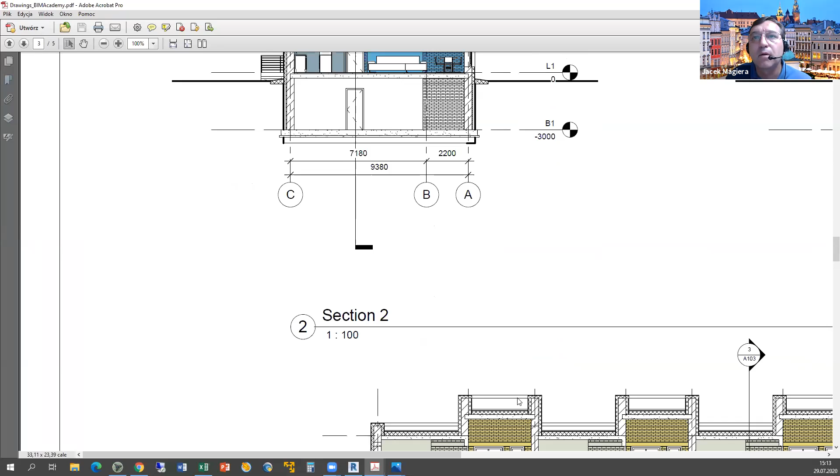It was supposed - you mentioned this as this element, yes? So this sort of - so section 2, we're in section 2 and we don't see, if I am correct, this element here. It should be somehow... so we go to the Excel sheet and say no.

Facade lamellas, do we have them? It's not the site - yes, there is something, but it's not really, yes, it was just rendering. It's curtain wall grids, yes. Looks like it's done.

Topography - a simple terrain modeled around the building, yes, we saw it.

Furniture is designed - is the design one, probably? It should be a furniture. So is the design one? So it means it's in agreement with the plan. Oh, it's ceiling, I'm sorry.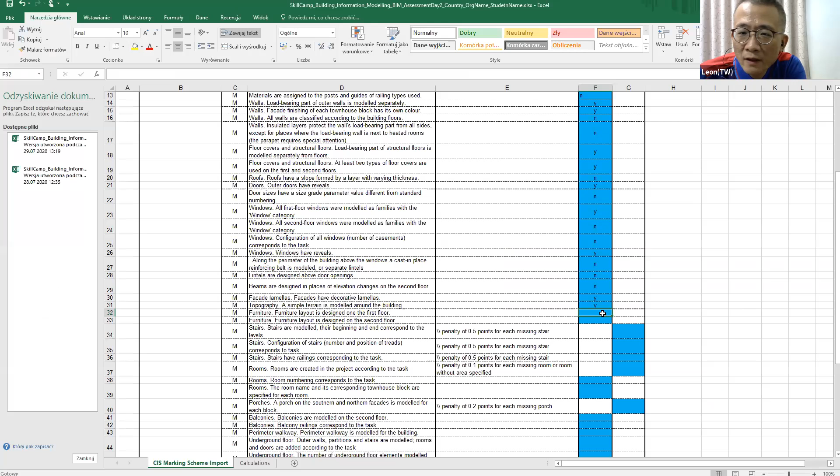In his layout there is a refrigerator, but in the original PDF there is no refrigerator in the kitchen. I'm not sure I understood, the connection was somehow poor. In the kitchen, what do we have? Leon meant the refrigerator was not in the original plan, correctly? Yes, yes. If you want, I can show you mine.

I think Jacek can also switch to the original plan and check. It's no problem. First we can go - is this the BIM Academy drawings? Probably the first page - no, the first is basement. Oh yes, there is something extra here in the plan - this is the dishwasher. Pretty good make.

And we had a stove here, a sink. So we have two things and they will have another one - so what do we do if something extra appears? Shall we consider this acceptable creative power, or should they strictly follow the rules? You see, Jacek, from one side it's under the table, so it's kind of inherited into the table. If everything else is okay and nothing else, I would consider it's okay. Well, you know, all the time we have students - if they're architecture students they try to think, okay, there's lacking a dishwasher here, so I'll put it and I will score, but it's not the thing, the way we think of it.

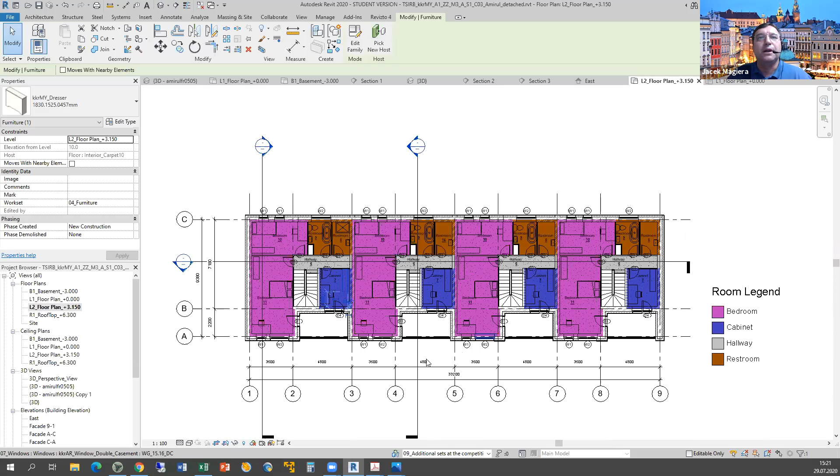Perhaps it's somehow aside from the wall, because this one is just next to the wall. Here we see a small distance, but I'm not sure whether we should care about this. And there is a desk, a bed, some sort of cupboard, also with some distance from the wall, but again, it looks to me it followed the original patterns the student was provided with, so nothing that I would say is not so. It's yes to me, but just say if you agree.

Agree. Stairs are modeled, their beginning and end correspond to the levels. So the stairs - perhaps we could use, probably, the section preview. It looks like they're aligned.

Of course we could see them more clearly if we put a camera in a room somewhere here, but I'm not sure we have a lot of time to play games with students like this. Yes, but it's aligned, it's fine to me - perhaps small, but it could be a Revit glitch from the rendering of the graphics.

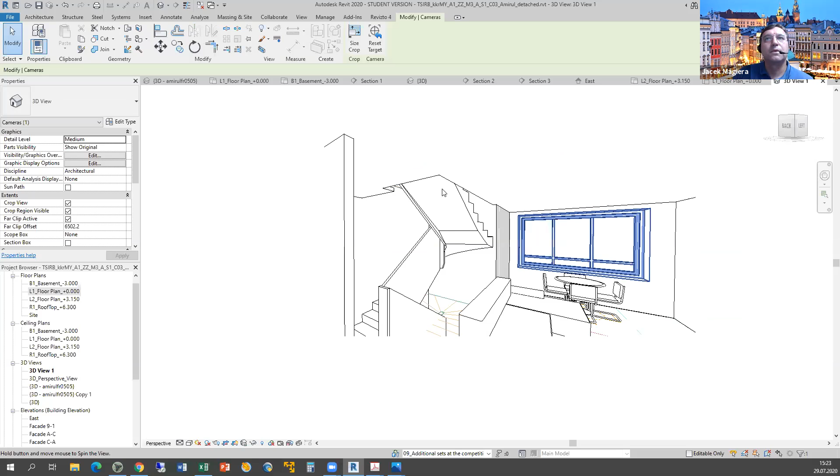Okay, so perhaps on floor plan 2 we could see how this ends here. So I also add a camera here to see, you know... it doesn't see anything.

Still not enough, or something is... oh, it's a wrong placement. It's a different setup for... oh, because it was put in the room, so.

Yes, this is the staircase, this is the slab, so it's perfectly aligned. No problem with this. And I'll put here...

Stairs, configuration of the number and position of treads. So, number and position of treads. The number is 1, 2, 3, 4, so it's...

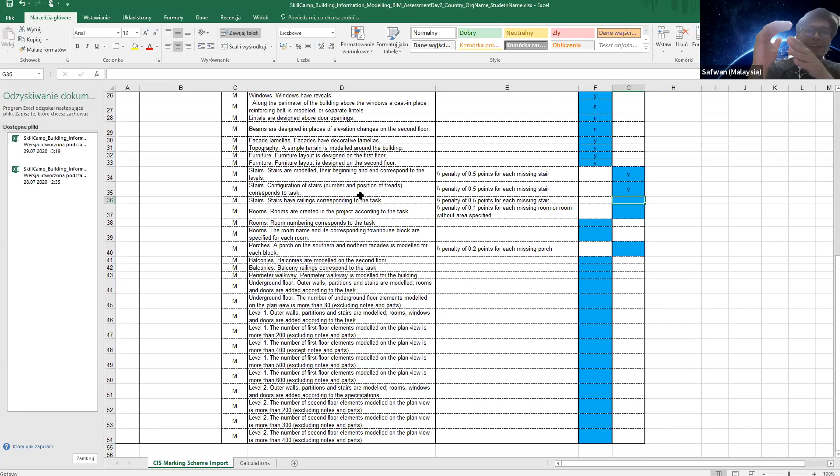Because for me the staircase is basically connected with the upper floor. So let's say if they are using 21 for the riser, imagine that there is some staircase popping up from another floor. From my opinion, no, you can play with the width or depth of the risers, and the height of them, to make them shorter or higher, and then you can force the staircase to have the required number of risers.

Yes, basically. So the point is whether we understand here this task, this aspect, as Alexei says, whether this is the number of staircases or the stairs in the building.

It should be 8, and those outside, like 4 and 4, so another 8. So altogether should be 16 stairs counted as objects, or whether we see the number as the number of risers in a particular stair, following the drawing and the PDF file that was provided as a source of information. It should be 21 risers, and here you have 20.

So this is the question here: how do we interpret this number? Yeah, and as we can see through the drawing, there are 20 risers, as you can see in the drawings provided.

I already calculated it. 1, 2, 3, 4, 5, 6, 7, 8, 9 - is one riser lacking here, and you've got up to the... oh no, it's not this one. Let me check... oh no, it's correct.

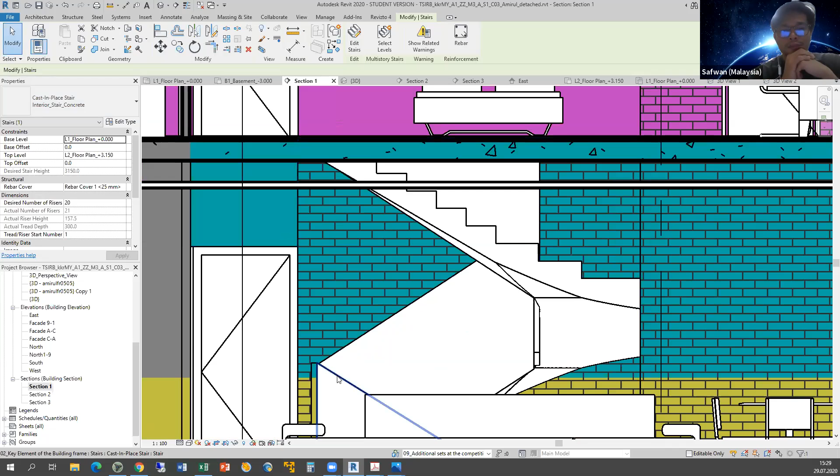I think at this point it doesn't matter what material it is. Yeah, I know, but I'm just trying to isolate it since it's difficult to see.

Well, it looks like we have what we're supposed to have here, which is this railing of the wall type, as we discussed. So it's yes for me.

Oh, but we didn't check the other one, which was perhaps on the 3D view.

Stairs and railings here are not... and here we have railings. And the stairs, I'm sorry, I did.

Okay, so... looks like it's yes, rooms.

Do we see any rooms here? Living room, but it's only the... rooms, 20.

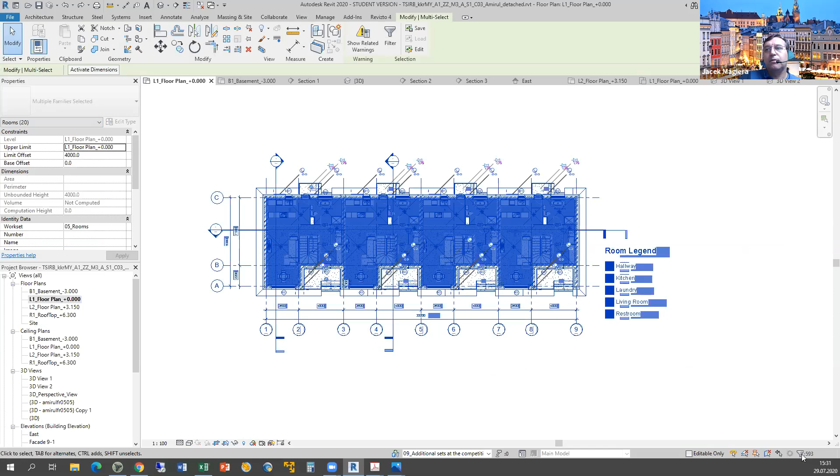So the category is present. We may try to filter them out to see.

Yes, you see the crossings. Yes, there are.

Okay, so it looks like this is the first time we see rooms. Room numbering should correspond to the task. So what was the task? It should be on the second floor, with this sort of numbering like on the first floor, 2, 5. So this is just some sort of tagging. Do we have any other requirements for the room description?

Because here we have the full, more elaborate taggings than the original drawing has, but again, I think we could accept this. Alexei? It looks according to what you just showed us. Maybe Anna is more familiar and can see, but I don't see any inconsistency. Well, they just added the description 'living room,' which is more informative, not only sheer numbers as the original, but the numbers are also present. So this numerical tagging, or whatever type parameter it is, is present. So probably yeah, that's here. Well, I think I would be very upset if somebody said no to my work if I did something extra to be more informative.

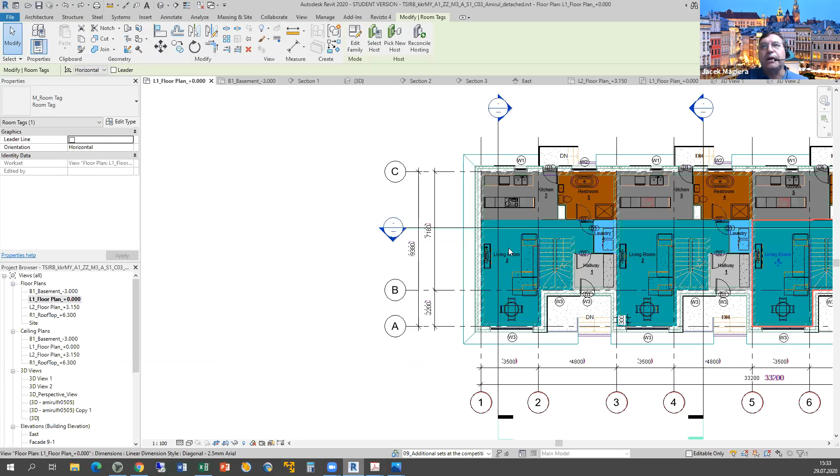Okay, this is the room here we see, and the room tag. There's no leader line, but there is also no leader line on the original. And the work set is correct also. We just believe it was the correct work set, and right now we can go back and check. So it's also a room, it looks very nice. I think it's because the tag family is different, so that's why you can see the room's names only. But these are the Revit objects, not from the CAD file, because I see it's a parameter here, and also this one.

So do we agree that we can accept this? The room name and its corresponding townhouse block are specified for each room. Yes. Anna, you do agree? Yeah, I agree. I think we should accept.

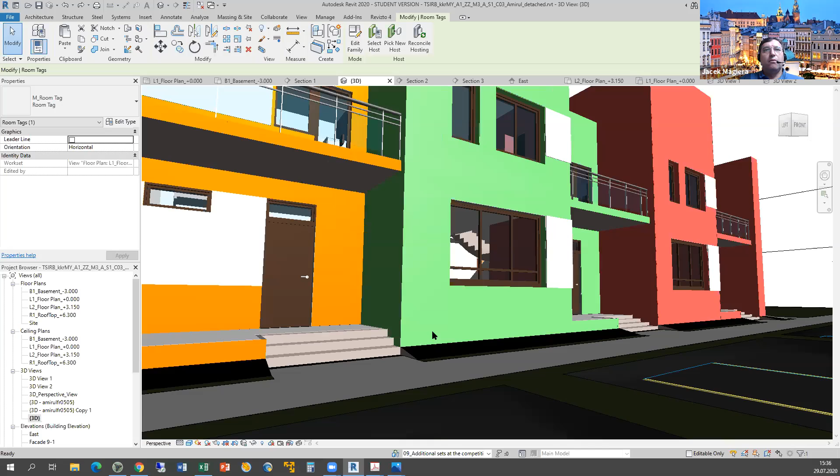Porches, we saw four porches, and it's just a simple check that they're present. So we see them on the 3D view for all the segments. On the other side also we have for all. Yes, we did it. So that's perfect. Yes, balconies on the second floor. We see balconies, no problem.

So railings correspond to the task. We have railings, metal ones with this is probably somewhere here. Yes, it looks very exactly the same. Even the posts are spaced with these hubs.

And they're lacking some bars here. We could see there is no bars in this original, and they have some sort of panels that are up from the floor level, and there is no panel here. Do we accept this? It's not exactly the type shown in the original renderings. It's somehow different in the lower part here.

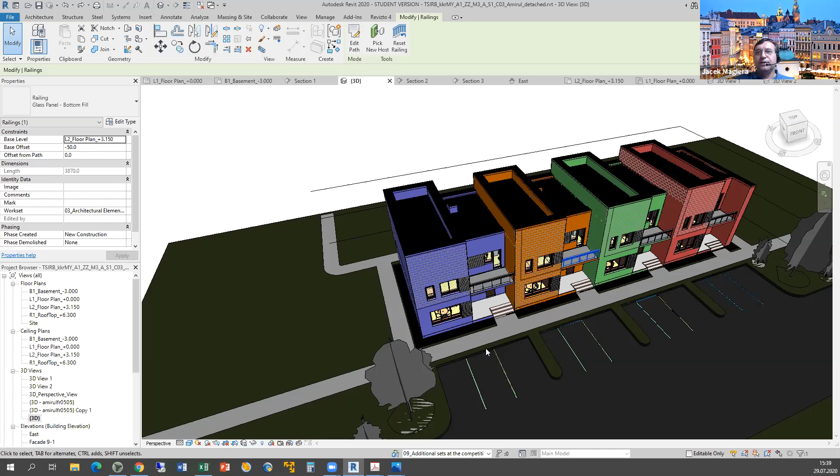Okay, perimeter walkway is modeled. We saw it a little bit different. And this is the question because there are some parking lots and some pavement, but it's not exactly the type of arrangement we had here. So this is more green stuff, no cars allowed. The students thought cars are very important to people and put parking lots, small parking lots, and it's a different solution. And there's also a road here, whatever. So another example of creativity and value added, competitiveness, which means okay, they didn't think about the parking lot, so we'll do it.

And so how do we score it? Well, for sure the terrain, I mean there is something like perimeter walkway, and this is modeled, but it's not according to the schematic. But at this point, we didn't write these words 'according to the task.' It was really said something that it's up to you. The terrain could be some extra trees like they put, it was really allowed to do some sort of that. So is it a yes, Anna? I think yes, it's perfectly done. Yeah, it's, but it's not following the

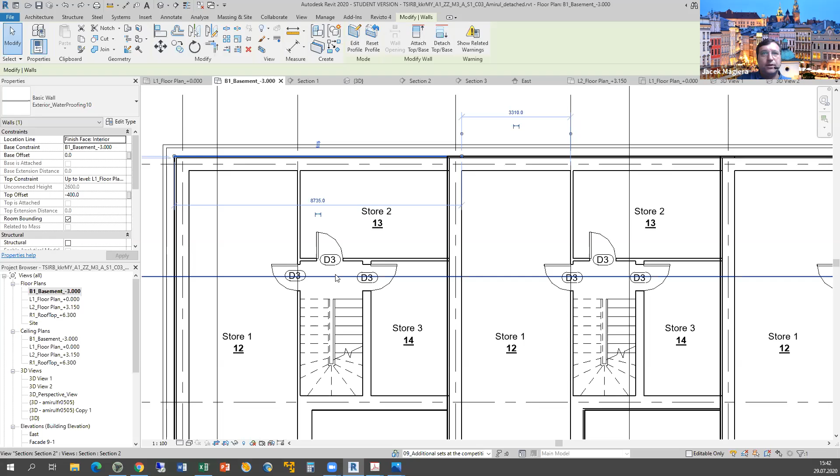Outer walls, yes. Partitions and stairs are yes. Rooms and doors, yes. This is a yes. Underground, the number of underground floor elements, blah blah. Let us see it.

Outer walls, partition, stairs, modular rooms, windows on level 1. So probably we'll have yes here, because we have seen so many times the level 1.

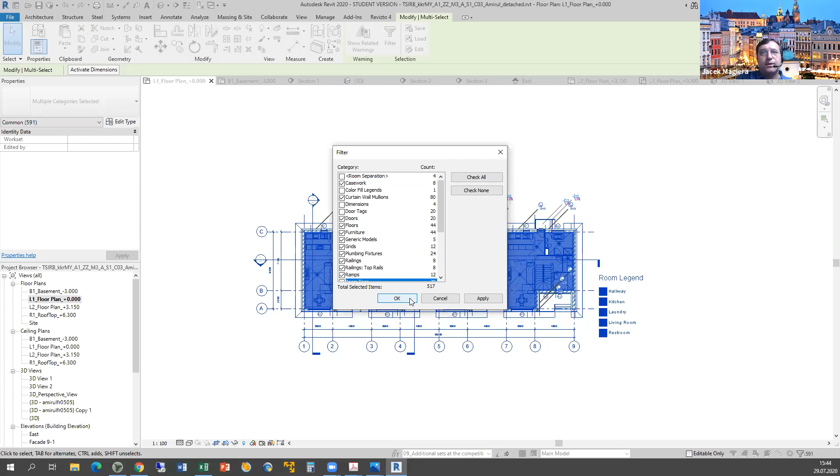And we see we have doors, floors, furniture, plumbing, railings, rooms, shaft openings, so on. So let us check. Outer walls, partition and stairs are modeled. Rooms, windows, and doors are added according to the task. Well, the only problem is with this family, with the balcony door, which was supposed, but it's not level 1, sorry. So here it's yes.

To me, it looks fine. Excludes, yes. So here are yes. On the second floor, we'll have the problem with the not proper family for this balcony window and door.

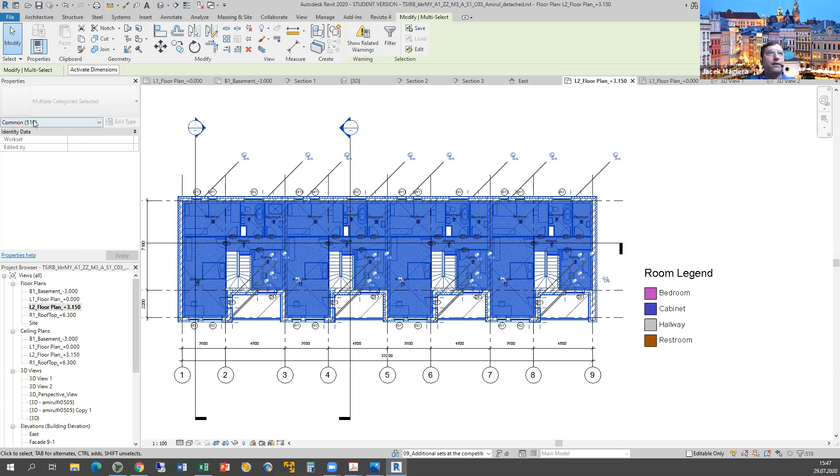So we go here and it's a quick thing. Yes, and yes, and that's it. A very well done task. I think it's the best we've seen.

So Safwan, congratulations Safwan, for your formally student. Thank you, Safwan, thank you.

Maybe one question: is it right now you provided us the improved version of your student's work from a self-training? Yes, this one is from the self-training, not the first training. Okay, great.

So it's right, very close. Honestly speaking, well done. All right, thank you, JK.

The time for the self-training and self-correction was really fruitful for Malaysia. They do a lot of stuff. Congrats, but I mean, that is really an example for all of us.